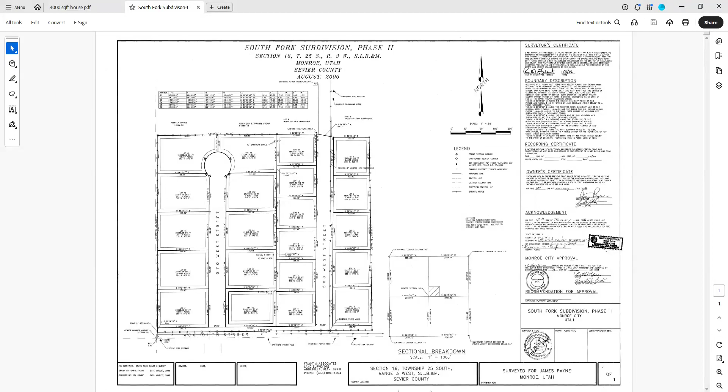So what we're looking at here, this is a South Fork subdivision. It is from Monroe, Utah, in Sevier County. It does have the metes and bounds description, the proper description here on the side. And if we look at those a little closer, that's a very quick way to put yourself to sleep. If we zoom up on here just a little bit, you get an idea of kind of what we're looking at here.

So we always start from a monument. The monument here in Utah is on the southeast corner of Temple Square. It's a little stone obelisk that marks the point where all the property in Utah is measured from, and everything has to trace back to it. Well, this monument is actually the one on the property.

All property goes back to the Base and Meridian Monument, but this one's a piece of rebar that was found with a plastic cap that was temporarily put in. The one that goes all the way back would be off the full description of the entire county map for Sevier County. But you'll see a lot of words in here like thence and hence and the metes and bounds. This is to get to this piece of property.

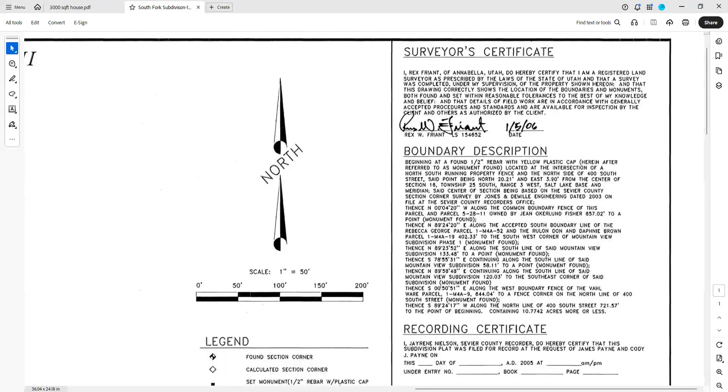Now, we have this chart here, which is labeled with C's. They're actually referring to curves. So curve 1 through 6. And the curves are what happened here on this cul-de-sac. So you have 1, 2, 3, 4, 5, and 6. This is the information needed to do the cul-de-sac. We're going to pick and do one of these lots, and that's going to be what we set for the house plan we're working on.

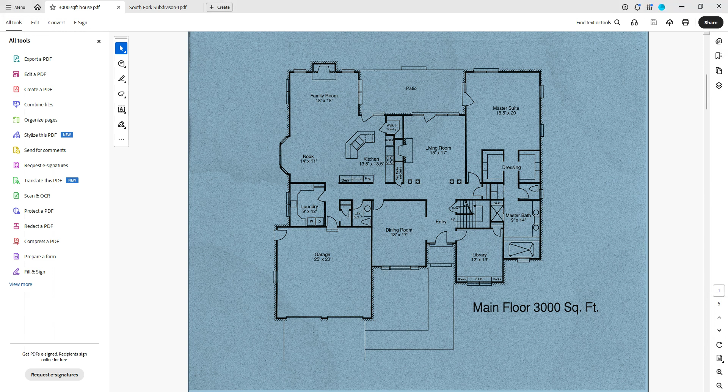I think I'm going to do lot 16 here today. The process will be the same for lot 17. It'll just be backwards. Now, you want to print this off if you haven't, or have it on a screen where you can see it. We're going to need to first use all of these metes and bounds.

And so we have here north 89 degrees, 24 minutes, 20 seconds east. And that's a total of 402.33 feet. That is this entire length to this point here. And then we go south, which is exactly opposite. So there's a little bend in the property line here.

Now there's also a 10-foot easement that goes all the way around. This is where your utilities are. So we cannot put the house in that 10 feet. Public utility easements have to be left with nothing permanent there. So you can put a fence, you can pour a driveway, but know that if the city or the utility company wants to access that utility line, they will tear out the fence and the driveway to get to it. And oftentimes they may not replace that.

It may just be at your cost. So be mindful of what you put in the easements. Okay. Not only do we have that, we also have setbacks that we have to worry about and make sure that our property is not encroached on. We have enough green space. The house isn't too close to someone else's house, and all these things go along with that as we work this through.

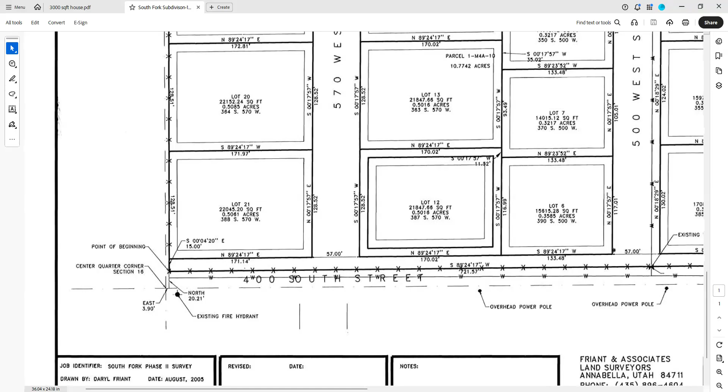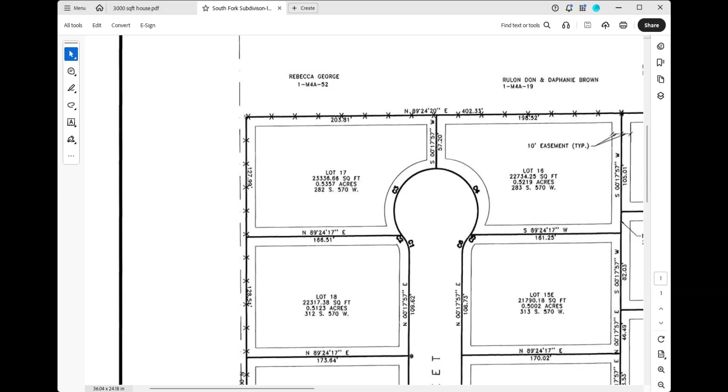So if we did that, then we're going to go all the way up and then over and then down and then over, and then we don't know what happens here. Okay, we really don't know how it was all laid out. So let's go ahead. I'm going to slide this over to the side, and we'll bring up our Revit program. And here's what we've done already. We're going to make some modifications to that. I'm going to take you through this. Again, we're going to do lot 16. You're welcome to do lot 17 or any of those lots on that plat map. If you want to keep it straightforward and simple, you can.

Now I'm going to go from here. I'm going to go back to my project browser. I'm going to go down to the floor plans. I'm going to go to the site plan. And this is what we have so far. Now, if I look at that, I can edit that sketch and get an idea for what's going on there. It was literally just a rectangle drawn, 120 by 150 feet, which is fine. It works, but it doesn't have any of the information needed to make it a working site plan. It's just there to kind of anchor a building. Okay, so we're going to create an actual site plan now.

And hopefully you do get that opportunity that you just have to go through and everything's rectangular for you and life's good. But let's go ahead and start setting this one up. Again, remember your scope box here. If we want to see it, it's got to be in that box. So we might have to make some adjustments with this scope box in order to see everything. But we're going to not worry about what's here right now. We're going to work on the site and get that to work.

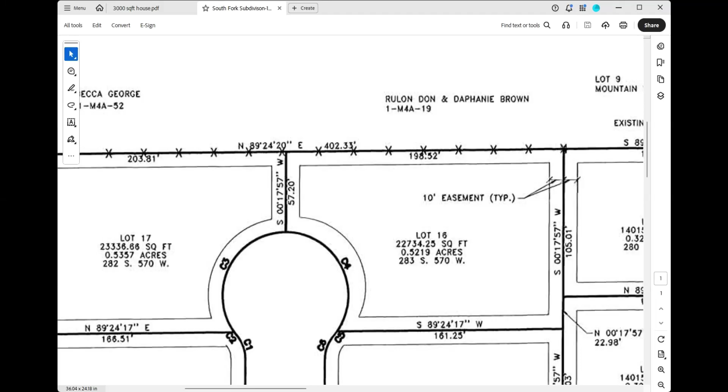So I need C4 values. So I'll find C4. And let's see, we're going to look for the chord length, which is this value right here, length of chord, 124.

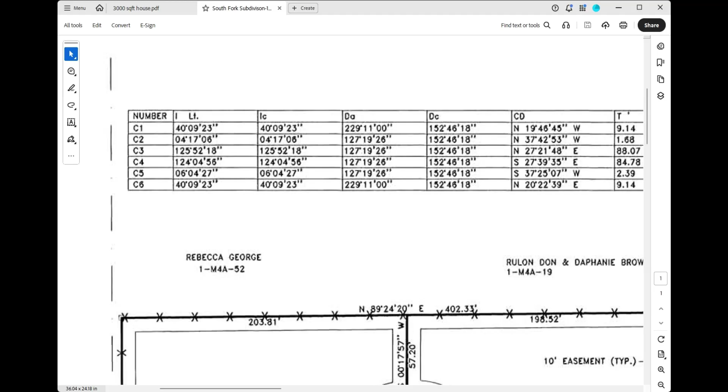That's the bearing. I want the length. Let's go a little bit more here. There we go. Now, I'm going to have to reduce that so I can keep track of what line I'm looking at, because it does get a little crazy here. So coming across, this is my bearing. Stays pretty similar there. A little bit of change. This is the actual one I want to do, this southeast value.

My chord length is LC, 79.5 is what I'm going to use there. Okay, so now I need to create this curvature with this bearing point. So we're going to slide that back over, and we can come to that in a minute and get that just a little bit arranged. All right, so insert, and again, our distance here that we've come up with, it's line 3, is 79.5.

79.5 feet. It is going to be going south. Boy, that's a lot of souths. The bearing on this is 27 degrees, 39 minutes, and 35 seconds east. Okay, so we're here. Now we're going to change this to an arc. And the radius of that arc is 45 feet.

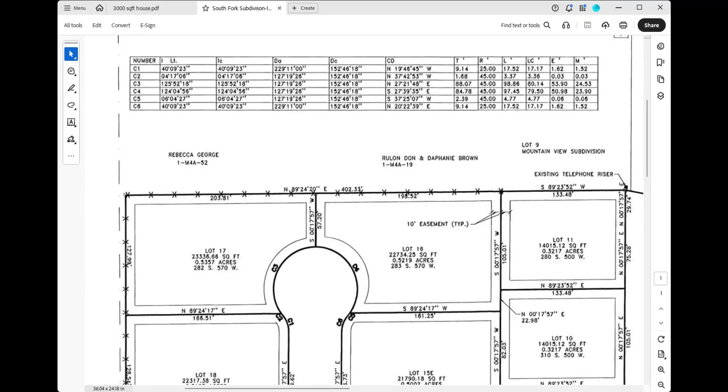All right, and there is the topo solid with the driveway where it's supposed to be. So now I've got to bring the driveway out to the cul-de-sac and put in the sidewalk, curb, and gutter. That is the next one. Hang on.